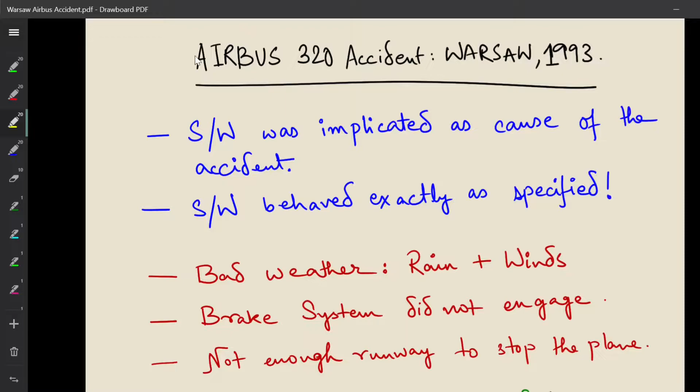So the case study we'll be looking at is one of the most classical case studies explored when trying to understand system dependability. This was an Airbus 320 accident which happened while a Lufthansa flight was landing at Warsaw Airport. The flight was flying from Frankfurt to Warsaw in 1993. There was a certain glitch in the software, and after all the interrogations and investigation into why this accident happened, it was finally concluded that the software was implicated as the cause of the accident. That was the final decision of the committee.

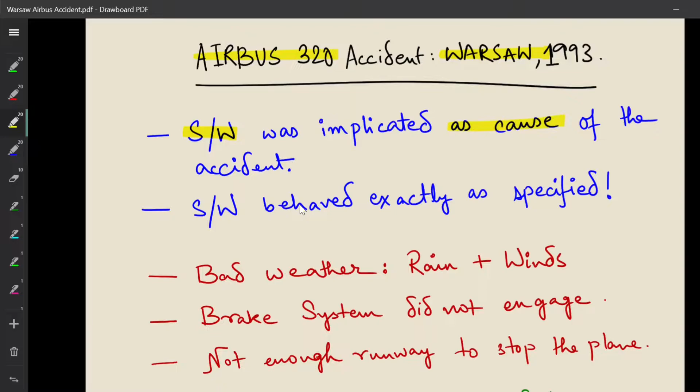But we will look into the fact that there were many other socio-technical factors which played a significant role in the software not behaving as desired. The important thing to understand is that the software behaved exactly as it was specified. So which property are we talking about? We are talking about software reliability. It was a very reliable software, and the flight control system which runs on an aircraft is an extremely safety critical software. If there is a failure of this software, the effects are catastrophic - you can have loss of human lives as a direct consequence. So it was ensured that the software was very reliable, but what we will see through this case study is that it was not dependable. Let's see why.

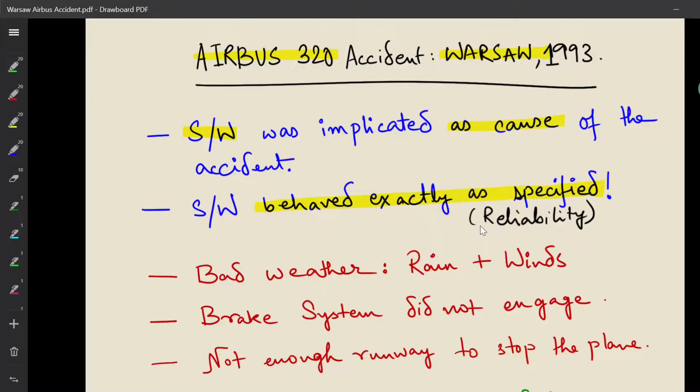So what happened? These were the conditions on the day of the accident. The accident happened while the flight was landing at Warsaw Airport - there was very bad weather, with torrential rain going on, and also very strong winds which were continuously changing directions. These two are very important factors which led to the software resulting in a crash.

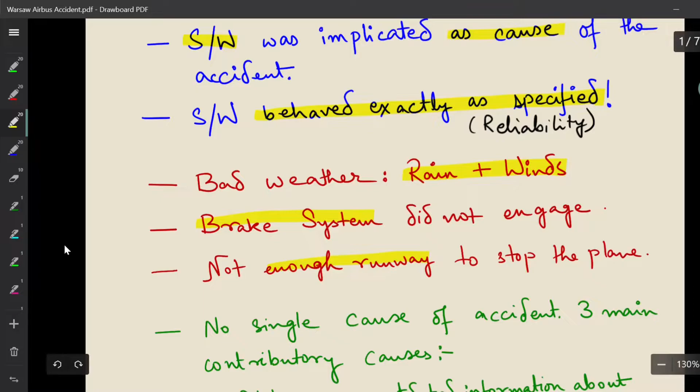Now let's see what happened. The main reason was that after the flight landed and touched ground, the brake system of the aircraft did not engage on time as required, and as a result, by the time the brake system got activated, there was not enough runway left for the plane to stop. As the plane was approaching the end of the runway, it had to steer towards the right, go off the runway, and then it crashed.

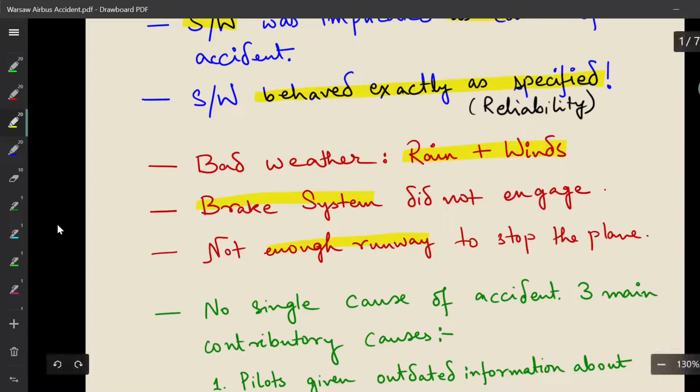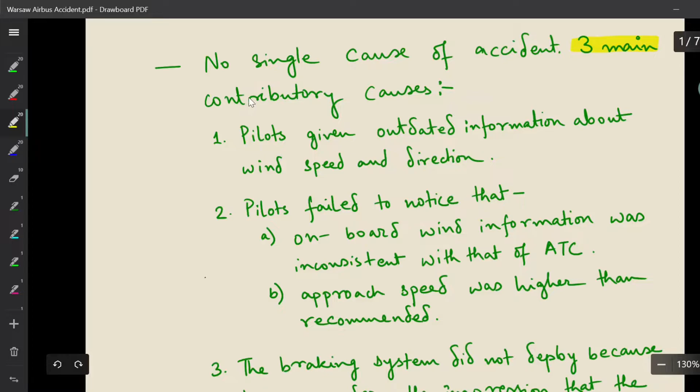But if we have to do an actual analysis, not a blame game, but to understand why this accident happened, we have to understand there were three main contributory causes. First, the most important - the socio-technical factor of how human operators or information provided by them can lead to operational failure. The pilots of that aircraft were given outdated information about wind speed and direction. We won't say it's completely the fault of the air traffic control tower - they provide this information to pilots just before they land - but it was very bad weather, and the wind was very strong and continuously changing direction. Direction and speed play a very significant role when an aircraft is landing. We will discuss this in detail.

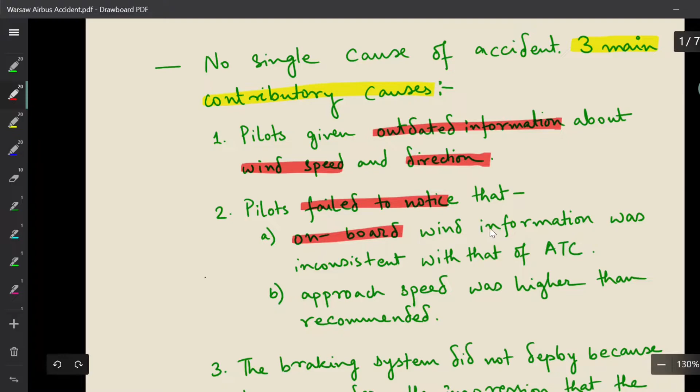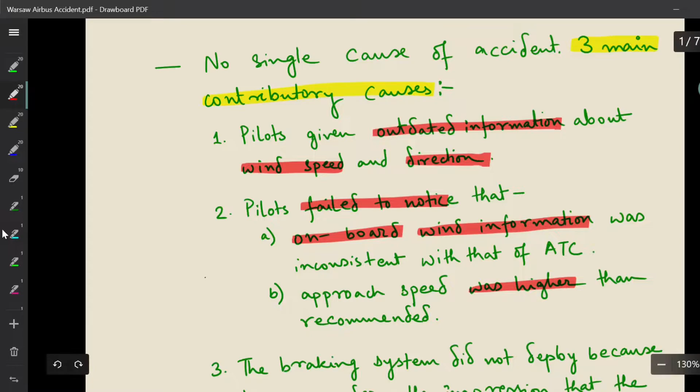Second, the pilots also failed to notice that there were onboard sensors providing some wind information which was not consistent with what the ATC or air traffic control tower was reporting. There was some inconsistency, so they failed to notice that, and they did not cross-check or verify with the ATC tower. As a result, the flight approached the runway at a speed higher than the recommended speed, and that was one of the most important factors why the aircraft ran out of runway.

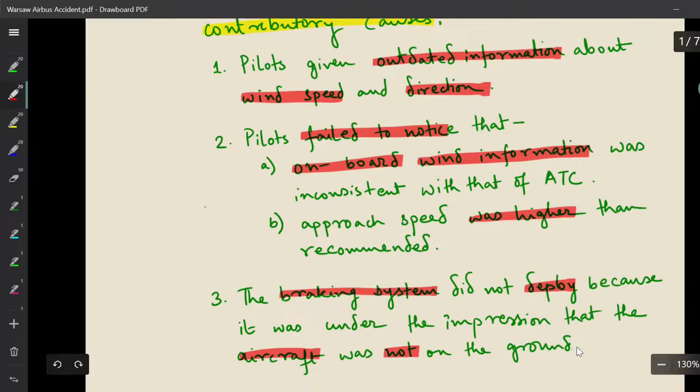The third thing is the software - this is where the flight control system comes into the picture. The braking system did not get deployed because the software was under the impression that the aircraft had not touched ground. Now this is something you have to understand.

When we are focusing on the software component, we have to understand how the braking system on a flight operates when it lands. You also have to understand that these flight control systems are operated by pilots, but there is an intermediate layer between the human input and the hardware controls, which is software.

This is the flight control system software, which decides whether inputs from the pilots should be propagated to the hardware controls or not. So suppose the pilots are compromised, maybe the flight is hijacked, and while the flight is in air, suddenly the pilot decides to engage the brakes. Should the brakes be engaged? The flight control system has its own set of checks to ensure whether the brakes should actually be engaged, based on the pilot's input, and those checks were not getting satisfied.

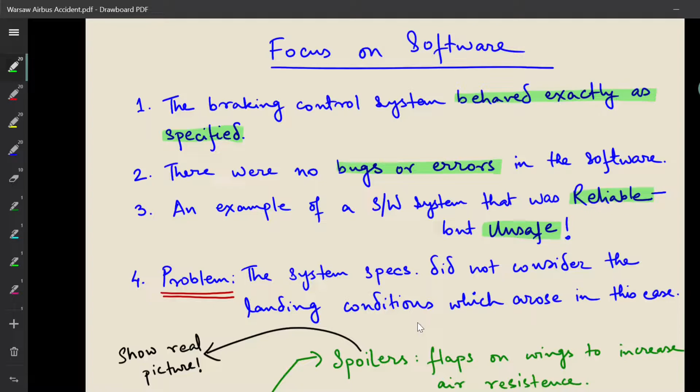This is where we say that dependability properties are interdependent. So what was the problem? It was reliable, there were no bugs or errors. This Airbus A320 was operating on different flights across the globe, no one was facing this problem. So what happened? The system specifications...

In the specification itself there was an error. And what was the error? It did not consider the landing conditions which were encountered on that particular day while the Lufthansa flight was landing at Warsaw. The landing conditions encountered were never thought of by the system engineers, and as a result the system specifications did not define the rules for this particular condition.

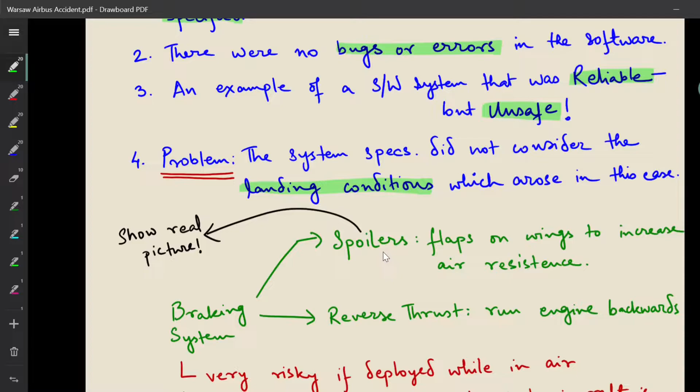We have spoilers, we have flaps on the wings. If you have ever taken a flight and observed, before the flight takes off you will see the pilot checks those flaps on the wings, whether they are working or not, and these flaps are actually engaged during landing.

So what does the braking system actually do? When you engage your brakes, two things happen. One, you have your engine, that propeller -- if it is rotating clockwise, when the braking system gets engaged, it starts rotating in the anti-clockwise direction. So basically you are running your engine backwards. This is called reverse thrust.

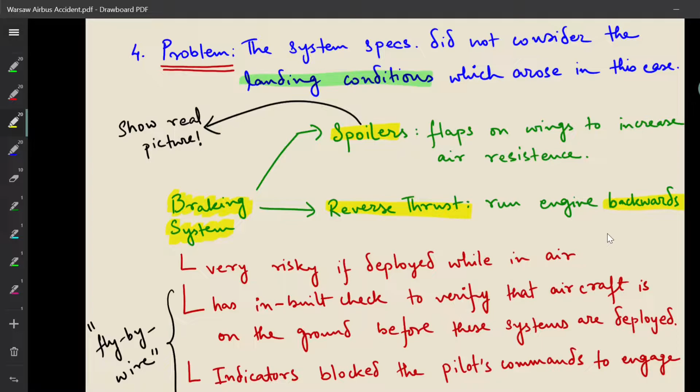This is one component, and the other is to increase air drag. How do you increase air drag? You engage the spoilers, so those flaps are raised to increase the resistance of the air, of the wind.

As I was saying, this braking system is very risky if it suddenly gets activated in the air while the flight is in the air. That's why we implement a concept of fly-by-wire. This means the flight control system has its own inbuilt checks to verify that the aircraft is actually on the ground before the brakes are deployed.

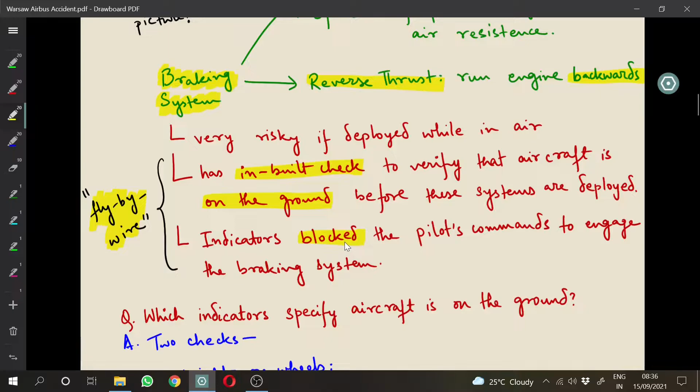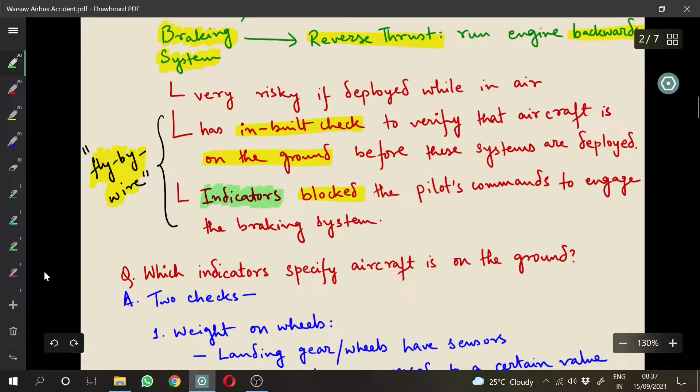If you don't get proper signals from the sensors on your flight control system, if they do not indicate that the flight is on the ground, then the pilot's commands to engage the brake are blocked by the flight control system. Now what are these indicators? These are basically some sensor values, sent to the flight control system, and based on those values the checks are done -- mainly two checks, which specify that the aircraft is on the ground.

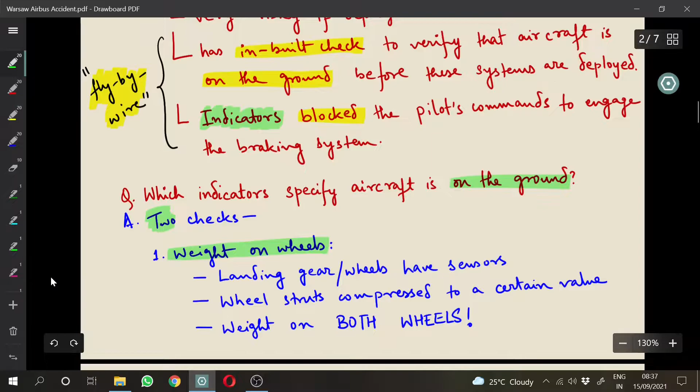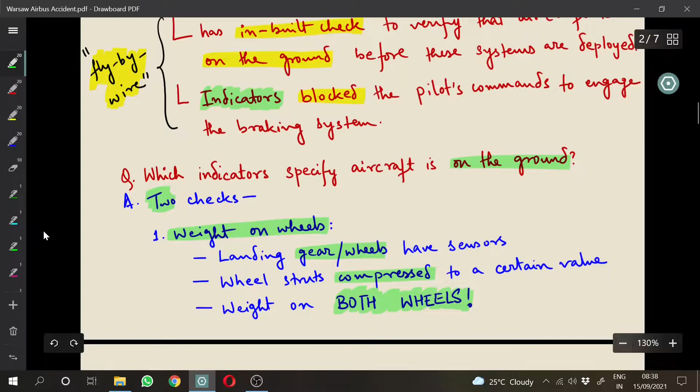What is the first check? The first check is weight on wheels. There are sensors in your landing gear, the wheels -- there is a shock absorber, a sensor. When your flight touches ground, the sensor senses that there is weight on the wheels, so the wheel struts get compressed to a certain value. The check in the previous flight control system software of the Airbus A320 said there has to be weight on both wheels -- the sensor on both the left wheel and the right wheel must give that feedback.

There is a second check, and it's not an AND condition, it's an OR condition. The second check talks about wheel rotation. If the aircraft touches ground, the wheels, the moment they touch ground, they will start rotating.

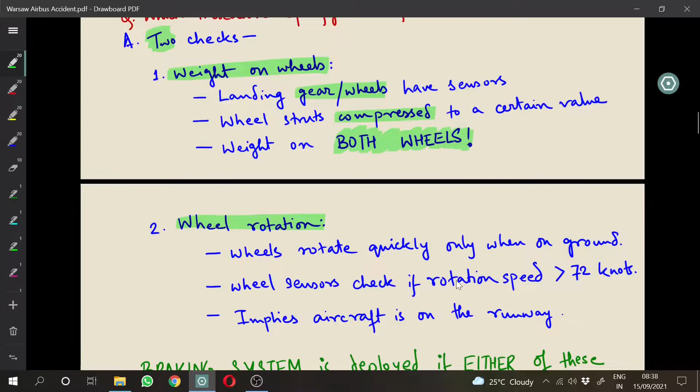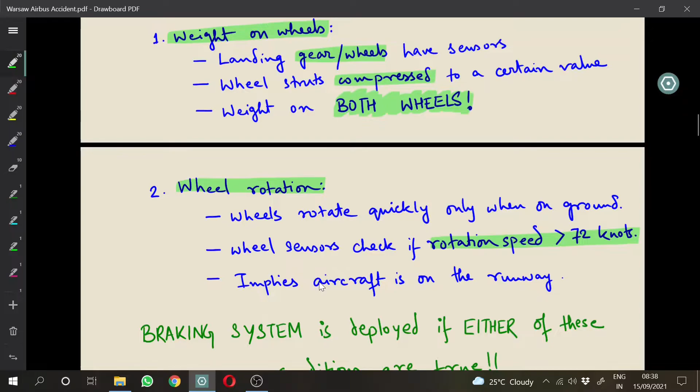Okay, so the wheel sensors check if the rotation speed is greater than 72 knots. Only when that happens does it imply that the aircraft is on the runway, that it has touched ground and is running on the runway. The critical thing to understand is that the braking system is deployed if either of these conditions is true.

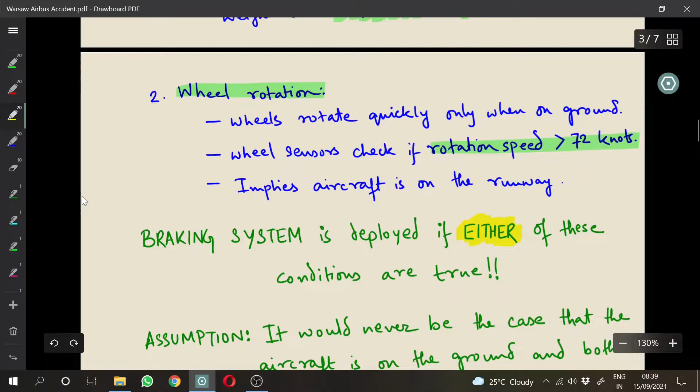So what is the assumption? The assumption here is that it would never be the case that the aircraft is on the ground and both these conditions are false. That was the underlying assumption of the software. The designers, the system engineers, decided that it will never be the case that the aircraft is on the ground and both these sensors are giving us false feedback.

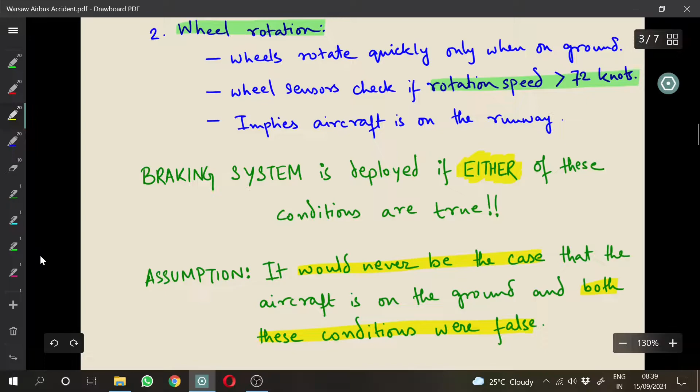But unfortunately, on that day, that's exactly what happened. Now we will analyze why that happened. Before that, let's look at the algorithm.

It's a simple algorithm. If there is weight on both wheels, or if the left wheel is turning... if there is not weight on both wheels, that means only one of the wheels has touched ground and the other is still in the air. This is possible, we will discuss this later. So if we do not have weight on both wheels, then we have to check whichever wheel has the weight, whether it is turning or rotating at a speed greater than 72 knots.

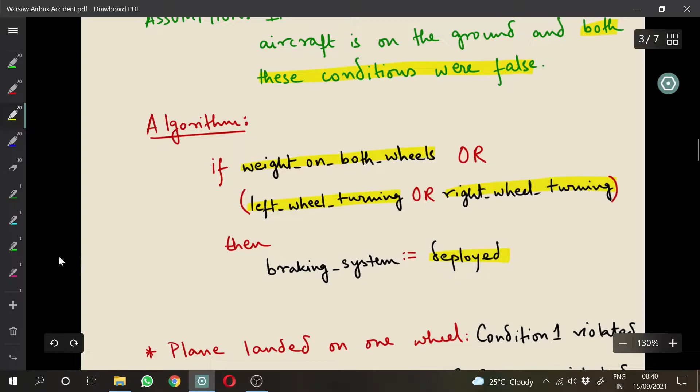So if either of these conditions is satisfied, then the braking system is deployed. What we understand is that both these conditions were violated on that day, and hence the braking system did not get deployed. Now, how did those two conditions get violated?

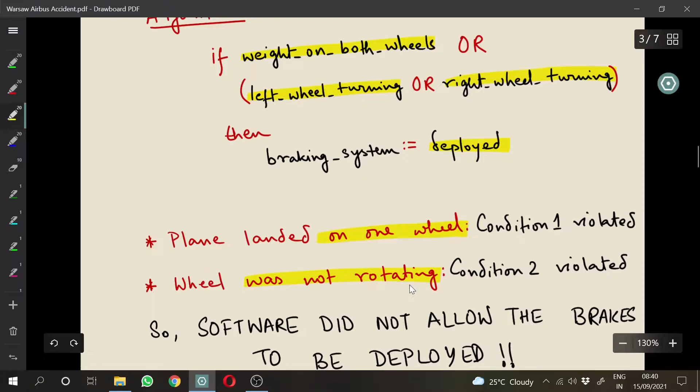For condition 1, the plane landed on one wheel, why this happened we'll discuss. And second, the wheel on which it landed was not rotating. Hence, both conditions 1 and 2 were violated, and the software did not allow the brakes to be deployed.

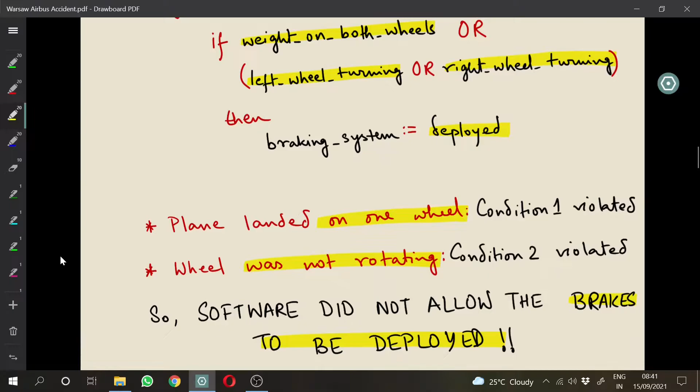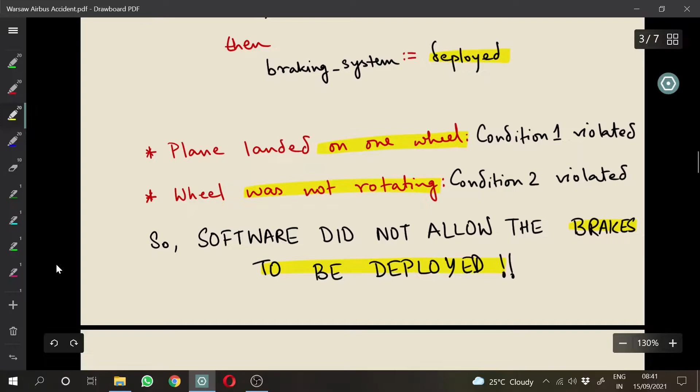So the software was working fine. This was given in the specification, it was following the specification. Now let us try to understand why these two conditions got violated. Let's look at what went wrong, why did these two conditions get violated?

So we discussed the three main causes, right? And the first thing we said was that outdated information about wind speed and direction was provided by the ATC. What the ATC tower suggested to the pilots was that there was something called crosswind. Crosswind is also known as wind shear.

Wind shear means if your plane is moving, the direction of the wind and the direction of the plane are orthogonal to each other, perpendicular to each other. So if the plane is moving towards the front and the wind is blowing from left to right or right to left, then it's basically crosswind. Now whenever there is crosswind...

The pilots basically bank on one side while touching the ground. The idea is that this wind shear will push down. So if it's blowing from right to left, the plane will bank slightly on the right, and only the right wheel will touch ground. Due to this wind shear, the left side of the plane will be pushed down by the wind. That's the way planes land when there is a crosswind.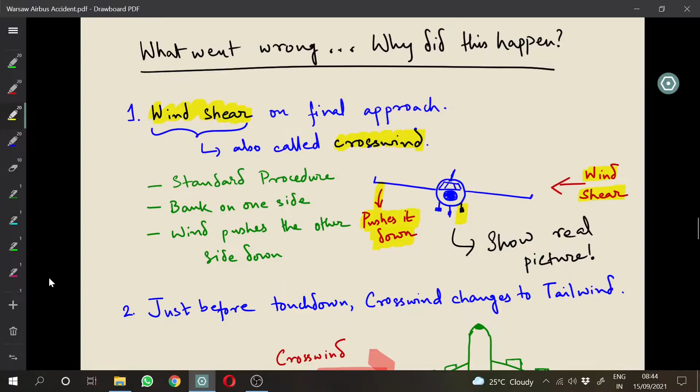But because it was a very stormy, windy, and rainy day, the wind was continuously changing direction. Based on this information, the pilots make some calculations. If you have a wind blowing from the side, you have to apply an additional force for the flight to stay on track, since something is trying to dislocate you from your track. So there is additional thrust provided by the engine.

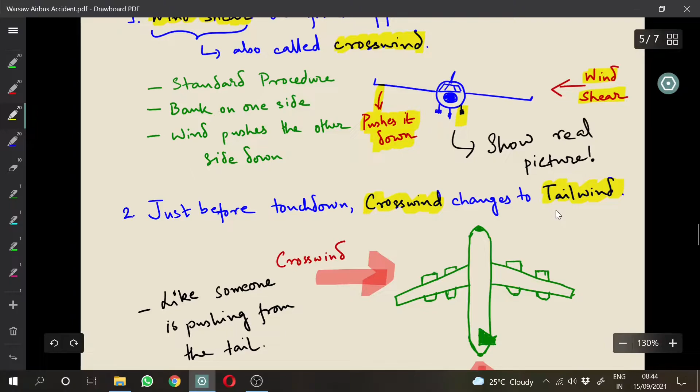Now just before touchdown, this crosswind changed to tailwind. What does a tailwind mean? Crosswind is basically blowing from the side of the aeroplane, while the tailwind is blowing from the back of the aeroplane—it's like someone is pushing the plane from the tail.

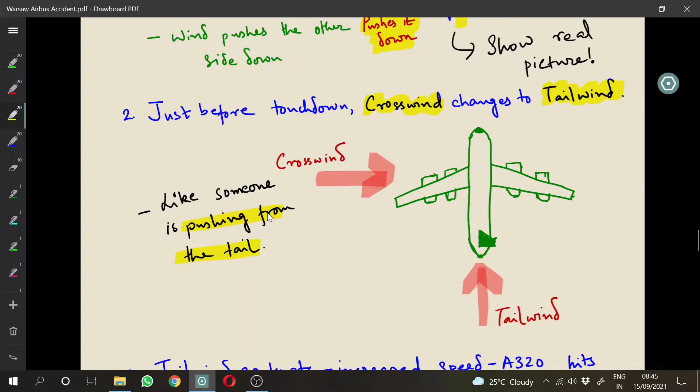So it's like you were already applying an additional thrust, and now because the crosswind suddenly changed to a tailwind, you got an additional jerk from the wind, and your flight got even more higher velocity. Now what happened due to that?

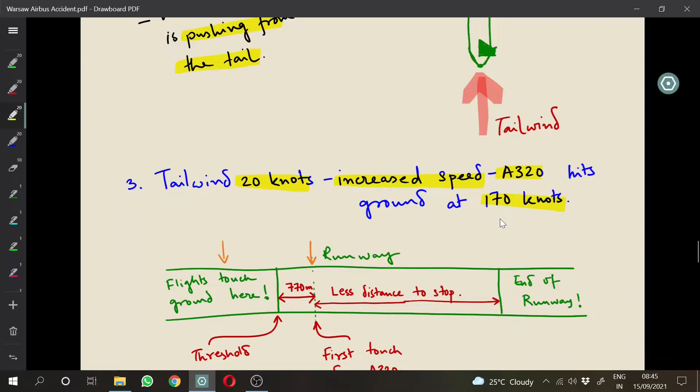This tailwind had a speed of 20 knots. So the flight, the Airbus A320, now with this increased speed of 20 knots, it hit the ground at 170 knots. It was supposed to hit the ground at a lower velocity, but due to this change of wind direction, it got an additional thrust from the wind and the speed increased, and it hit the ground at 170 knots. Now first thing you have to understand is what happens now.

In your runway, in a conventional runway, there is a buffer area within which the flight must touch ground. Then you have your runway which ends over here, and after that this is end of runway. So this is very important. Your flight must touch ground before this line.

But then because of this tailwind, what happened was that the first touchdown happened roughly 770 meters after this threshold. It got an additional jerk, so it could not land or touch ground within the threshold area, and it touched ground after 770 meters into the runway.

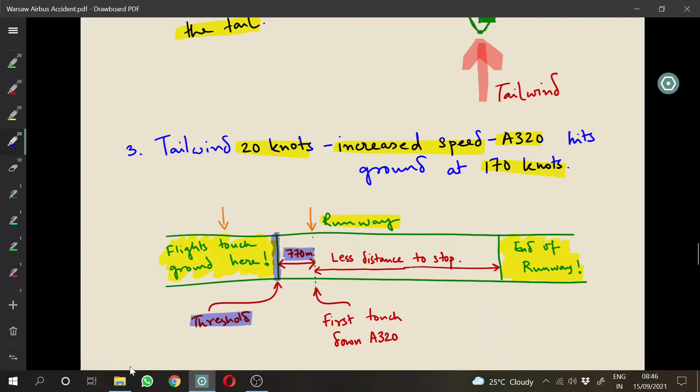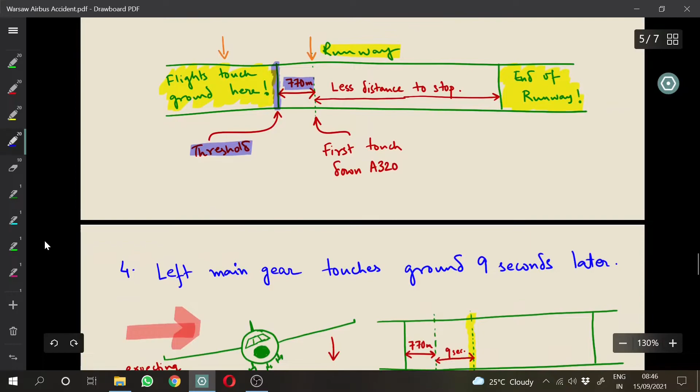So first of all, we are now getting less distance for the flight to stop. Second, it has an additional velocity, so it has to apply stronger brakes. It will take more time to come to a stop, and it has less runway available.

Next, what happened: because the information was there is crosswind, there was a banking. The pilots had banked on the right hand side, and hence only the right wheel touched ground. It was expecting the wind shear to bring down the left hand side, but because the crosswind changed to a tailwind, this does not happen.

So the right wheel has touched ground. The pilots are expecting the wind shear to bring down the left wheel to the ground, but that does not happen. So condition 1 gets violated: weight on both wheels. That condition is violated. Now we have weight on only one wheel.

But then this right wheel which touched ground, this should have started rotating. The second condition: it should have started rotating at a speed greater than 72 knots. But that did not happen. And what was the reason?

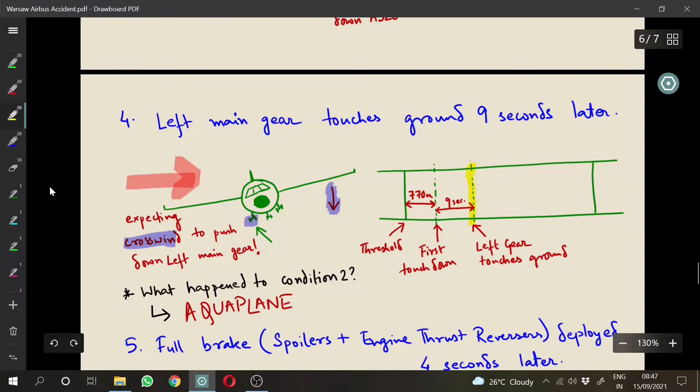The reason is something called aquaplaning. Aquaplaning is basically when there is water on the runway. Because it was a very rainy day, the runway was wet, and when you have water on the runway, there is a very thin layer of water between the wheels or the struts and the runway, and the wheels don't rotate - they basically touch and skid. They skid on the runway, they are not rotating, they are skidding on the surface of the runway. That's called aquaplaning.

So weight on both wheels was violated. The right hand side wheel which touched the ground was aquaplaning, it was skidding, and hence it was not rotating. So the second condition also got violated. So the sensors were telling the software that the flight is still in air, it has not yet touched ground, and hence the brake system was not getting engaged, although the pilots had given the signal.

Now what happened? First touchdown happened at this point, 770 meters into the runway. The brakes got engaged only 9 seconds later, when this left hand side wheel finally touched ground. So the first condition got activated: weight on both wheels. But by the time it got activated, 9 seconds had elapsed, and 9 seconds on the runway at full speed is a huge distance covered.

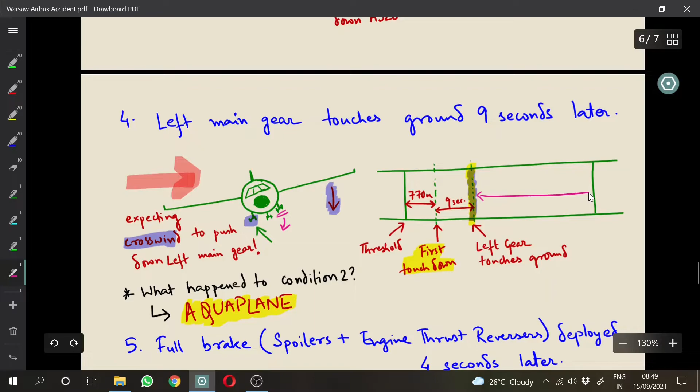So what happened basically is that the left gear touched ground somewhere at this point. So now I have even less runway left to stop the plane. Now the moment it touched, there is a certain delay for the sensor signals to be captured and propagated to the software system, and the software activates the hardware controls for full brake, activating the spoilers and the engine thrust reversing. This takes a certain lag, and that lag was an additional 4 seconds.

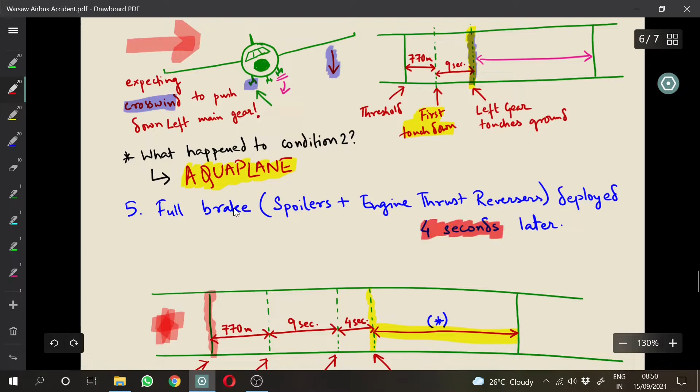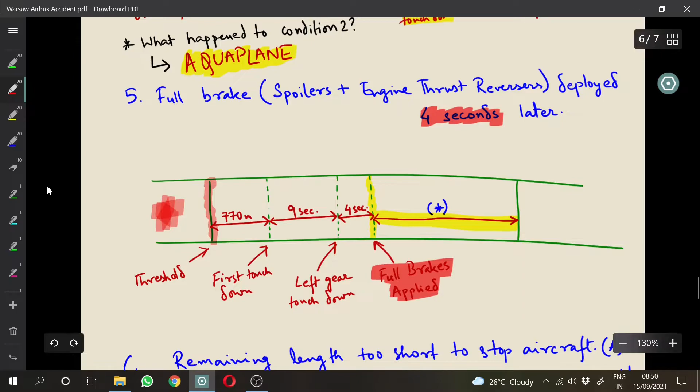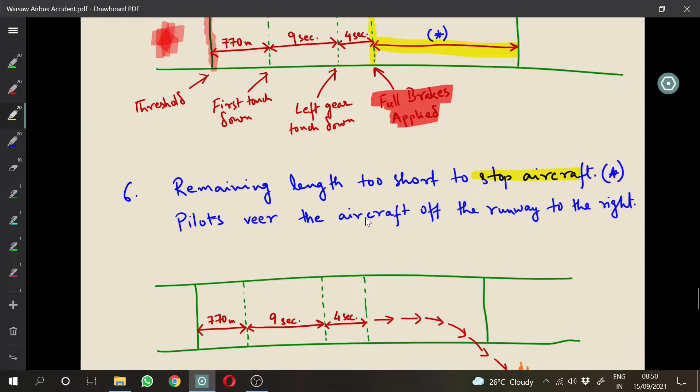So by the time the full brakes were applied, the amount of runway which was left is very less. This was too short for the aircraft to stop, and the pilots had to veer the aircraft off the runway to the right, and it basically hit some forest, trees and all, and it caught fire.

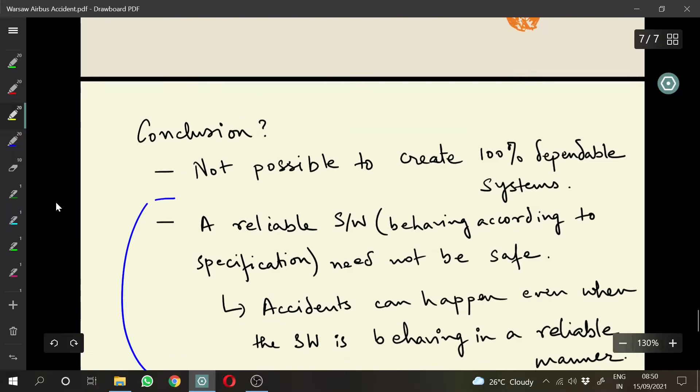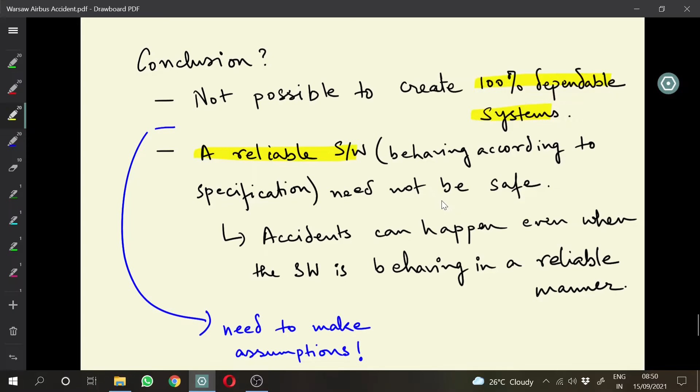So what is the conclusion? The conclusion is that it is not possible for us to create 100% dependable systems. A reliable software which is behaving according to the specification cannot be assumed to be safe just because it is reliable. So even when the software is behaving in a reliable manner, failures can occur, accidents can happen, and the effects can be catastrophic. So now we'll look at a flight simulation video of this incident.